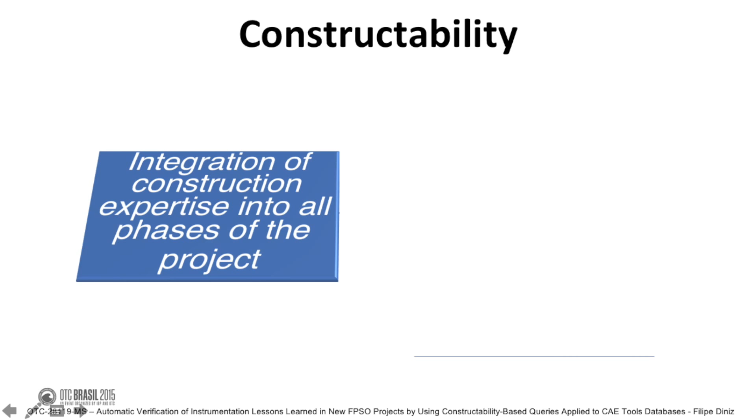Good morning. Our work philosophy is to take data, turn it into information, and then turn it into knowledge, and finally into wisdom. This is the role played by integration between engineering design automation and constructability. But what is constructability anyway? Well, constructability is the integration and application of construction expertise throughout all project phases. And it comes as a benefit for cost, schedule, quality, and overall goals.

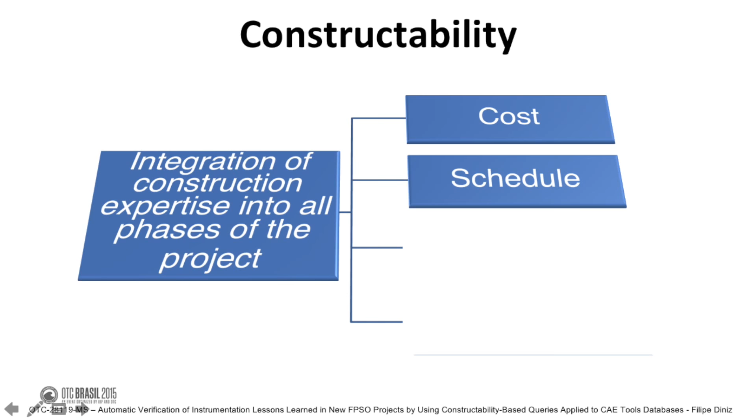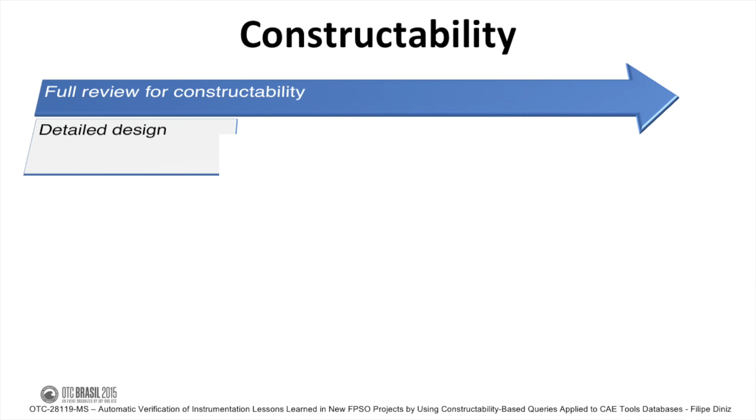And constructability is the main actor in the quality assurance program for Petrobras pre-salt replicant projects. The design of all new units is fully reviewed for constructability throughout detailed engineering, using lessons learned, and items are evaluated based on team past experience from previous projects, and it's all fed back into the design.

Okay, in Petrobras quality strategy, both lessons learned and constructability have their own dedicated workshops. On those workshops, all items related to each discipline are identified and evaluated. And all problems ranked with high potential risk for future projects have to be presented with possible solutions. And they have to be inserted in the action plans and regular follow-up activities.

But as I told you, it all has to go back to the design. But how can I accomplish this? I mean, how can I take data and turn it into wisdom so these issues never happen again? The answer is by using engineering design automation. Our team's job is to take issues that are considered to be harmful to the engineering design quality, compile them into lessons learned and engineering rules, and implement computer programs that will be able to make automatic analysis for some questions raised by these lessons learned and engineering rules.

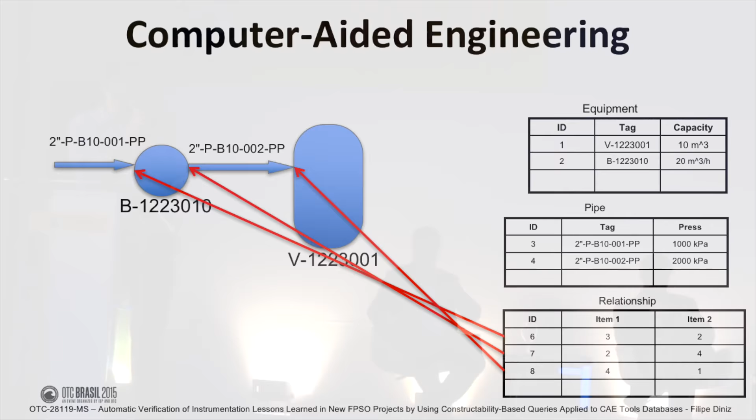But there's more to it. There is also another table which represents which elements are connected. And following the instructions represented in the database, you can easily recreate this engineering design. And you can see that this database has a full correspondence for this engineering design.

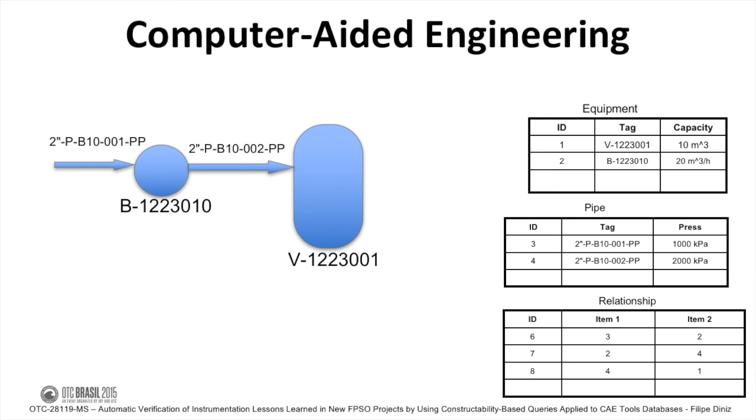But the true gain here is this kind of approach can allow you to generate automatically equipment lists, pipe lists, extract to-from information, and make automatic consistency analysis. For instance, you can check if process information from connected items is actually consistent. So with this mindset, I'll show you 3 analyses that were results from constructability workshops related to instrumentation.

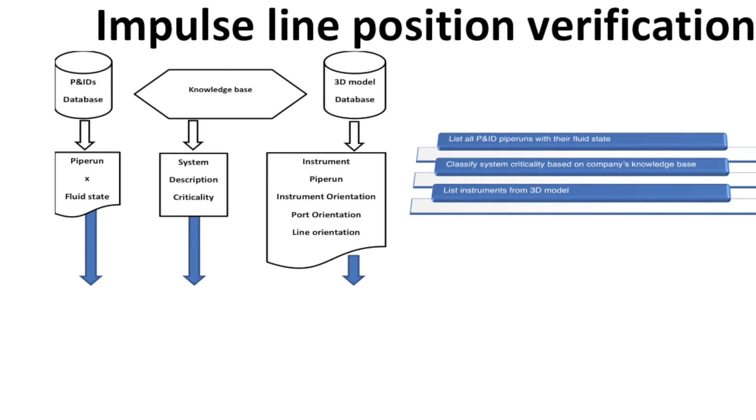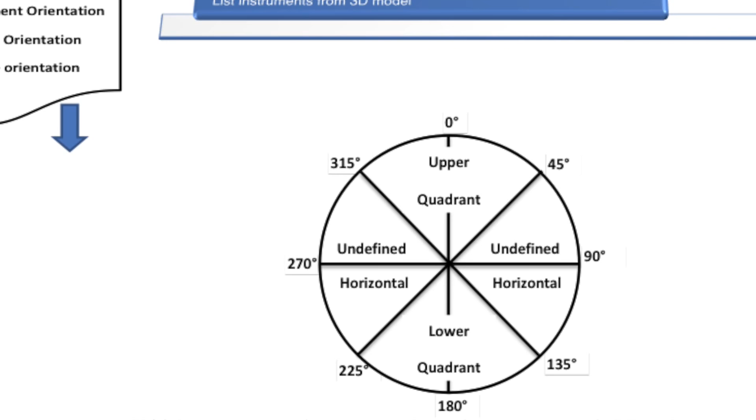And the second part of this twofold step is to make a list of all 3D model instruments along with that information here. Okay? And line orientation, instrument orientation, it's all referenced to this figure, where the quadrants, horizontal, upper quadrant and lower quadrant are all represented here. Once you did it, you can move on to the classification itself.

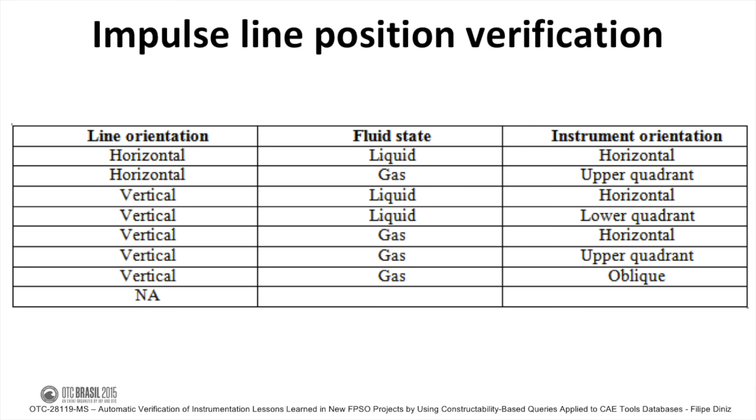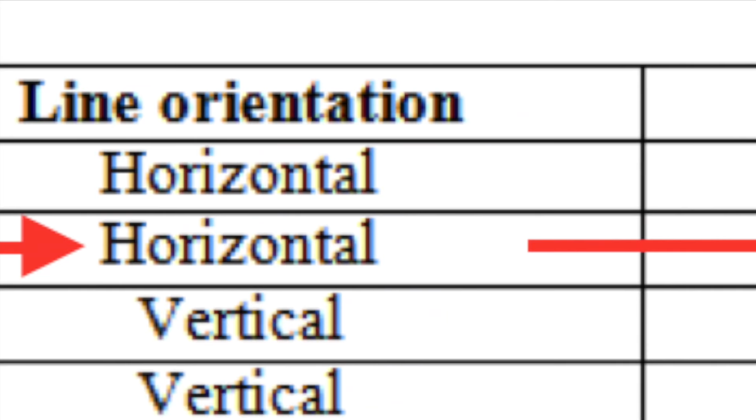And for the classification, basically you have to pick one of those patterns to the hookup position configuration. If one of those patterns fits, then it's okay. If none of those patterns are proper to this configuration, then this instrument has to be verified. For instance, let's look at this second line. If the line orientation is horizontal, the fluid state is gas, and the instrument orientation is horizontal, then the system will suggest, look, this instrument orientation needs to be upper quadrant, and so on. Okay?

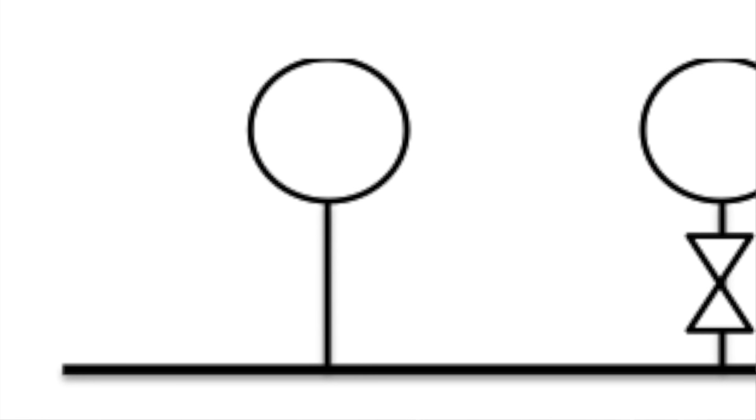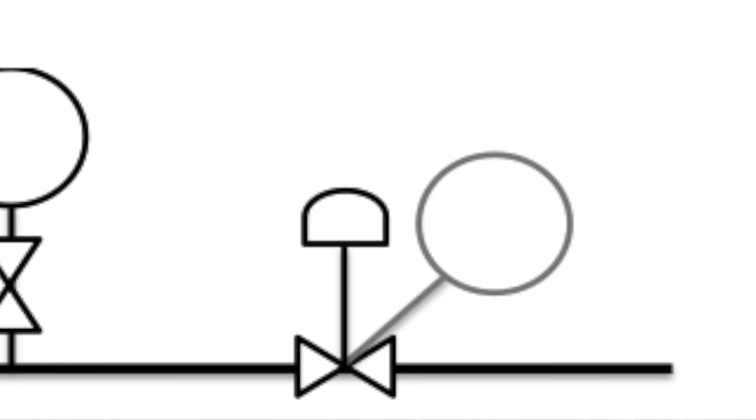The second analysis is flange material in process connection. So for all pipe run mounted instruments, we need to see if the flange material has the dissimilar material that may cause galvanic corrosion. And this is accomplished also with a 3-step procedure. The first step is to list all pipe run mounted instruments. An instrument is considered to be pipe run mounted if it presents one of these configurations: pipe run and process connection and instrument, or pipe run, secondary pipe run with piping valve and instrument, or a pipe run with inline instruments.

The second step is to list all 3D model instruments that are connected to a piping component through a joint. And the third step is to join those two results in order to compare them to the component's knowledge base, and then identify if there is any chance of dissimilar material for the flange in the process connection.

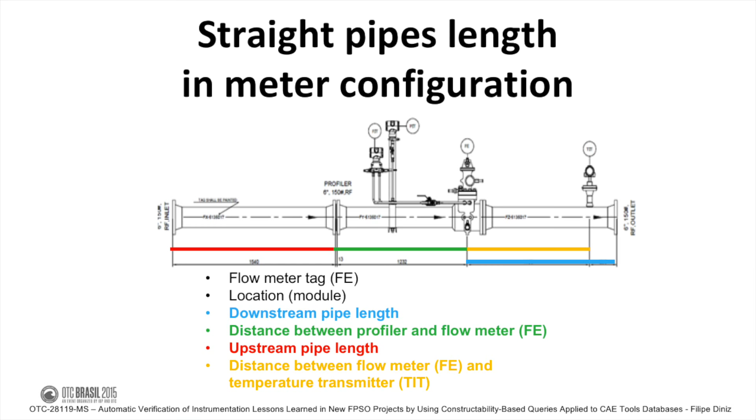The third and last analysis to be presented here is about straight pipe length in flow meter configuration. Some pipes that belong to the flow meter arrangement have to present minimal length. So, in the end of this analysis, we have to come up with this table containing the flow meter tag, its location, and the length of all these pipes: the downstream pipe length, the distance between profiler and flow meter, the upstream pipe length, and the distance between the flow meter and the temperature transmitter. And it's all normalized by the pipe inside diameter, and it all has to be according to ISO 5167.

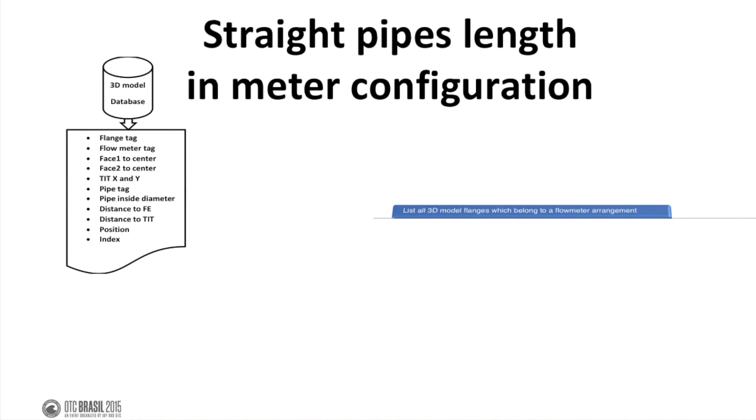And how do we accomplish this? One more time, with a 3-step procedure that was automated. The first step is to list, for all flow meters in the 3D model database, the flanges that belong to this arrangement. The flanges here will act as the limits for all pipes whose length needs to be calculated. Then we have to estimate if those flanges that belong to each flow meter arrangement are upstream to the flow meter or downstream from it. And then, at the end of this analysis, we have to calculate the lengths based on the interface defined by the flanges, and we have identified those flanges based on their index and orientation.

And in conclusion, we have demonstrated that automated verification of engineering rules is very useful, and it brings advantage in both time and effort in the long run. The main goals of each analysis were successfully achieved, and with minor adjustments, they can all be reused by other projects in the future. Other queries and analyses are being developed for other disciplines, since this whole approach of using engineering design automation has been proved to be successful.

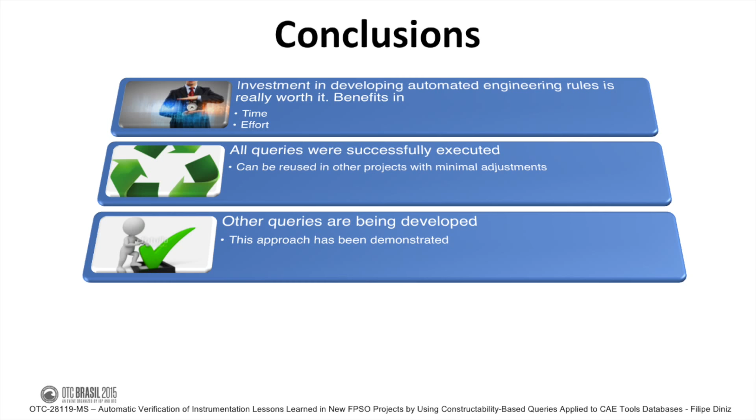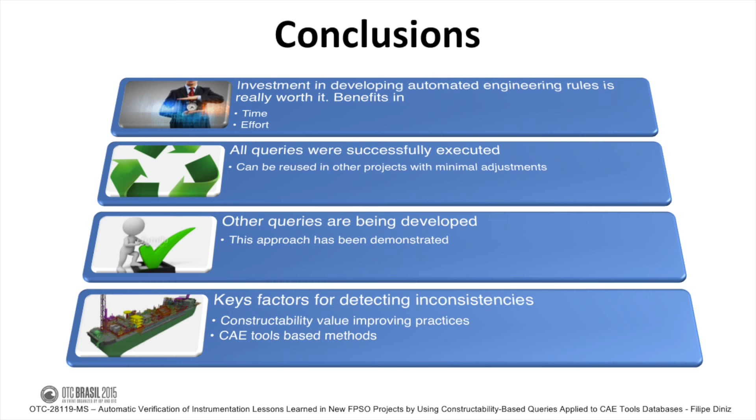And constructability value improving practices, or VIPs, combined with engineering design automation, were demonstrated to be key factors for detecting and preventing inconsistencies in all these projects. And considering the amount of documents, interfaces, schematics and models and their size for these recently elaborated mega projects, those approaches were demonstrated to save time and resources when compared to conventional methods.